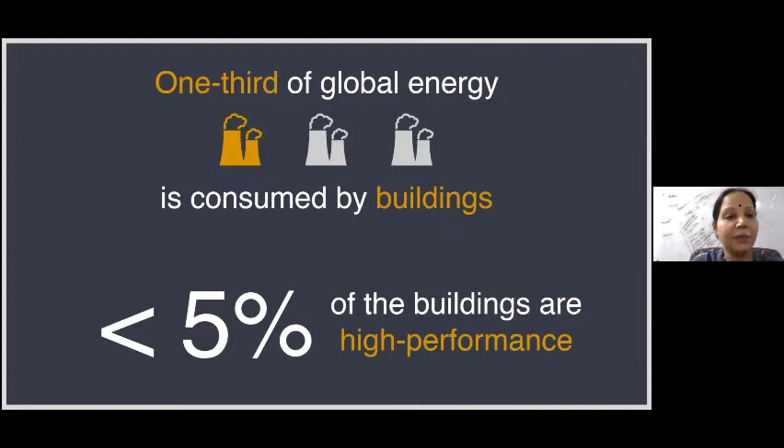There are two ways of looking at this. One is looking at existing buildings, and that is a different approach. Here the engineers can come in, see what we need to retrofit, and set up a monitoring and verification plan. There's a different process to it.

But what we can look at more intently, more keenly, is new buildings. In new buildings, how do we actually develop an approach? How do we have a framework? How do we go about creating the best possible spaces at the least possible cost, and at the same time, with the least possible resources, energy, and water consumption?

This approach itself is called the integrated design approach. There's no scientific terminology to it, it's just a collaborative approach where all of us sit together on the same platform, understand the design, and try to achieve the ideal or optimal approach to design.

So here we collaborate, we predict. When I say we predict building performance, we actually use scientific simulation tools, software tools. In fact, most of my interns who come in and intern with us, we teach them software tools, so they become productive from day one they join an organization. Today, architectural firms don't really use software tools, they're still using the time-tested way of trying to develop a design.

But how do we actually bring in science, and how do we prove our designs? We want to move from being a subjective field to making it an objective field. If I say I've put a window here, I need to tell them that it actually adds this much value in numbers. This is where we bring in the collaborative, predictive approach, and therefore bring in optimization. So new buildings is where we are trying to focus and create a better approach in design.

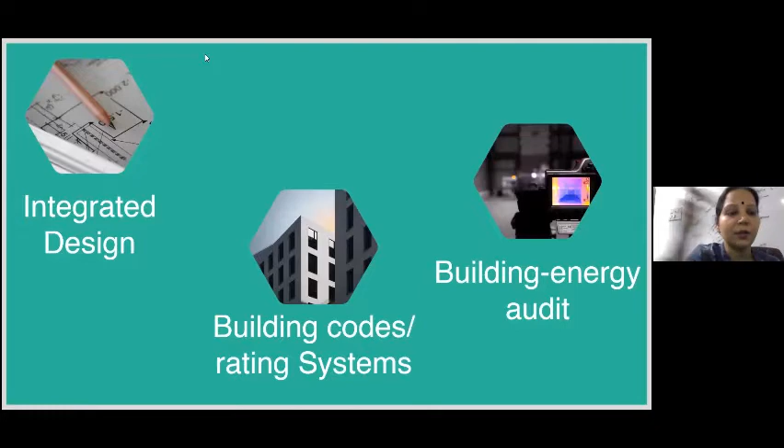So we look at codes and rating systems to guide us. People come and tell me it's just a rating. I say, yes, if you're looking at it as a documentation process, it's just a rating. But if you're looking at it as a tool to actually enhance your design process, that's where you can achieve the entire integrated design approach.

So I'll talk a little more on what the design approach itself is. We're looking at people who are using the building, and ultimately we're looking at the planet. We are using lesser resources, lesser water, lesser energy, and minimizing our waste. People think energy is the biggest crisis, and even government focuses on energy till now. But our biggest crisis is waste, how we manage our waste, and our biggest crisis is water. These are the two bigger crises in terms of climate change and sustainability that we are looking at. All this will contribute to the planet.

Most often people get confused when they say we are doing green or being sustainable, thinking we are spending more. If we have the time, I will talk about how we've actually minimized our first cost, not only operational cost, but also first cost. So we're looking at profits also, the 3 P's of any approach.

So what is the effect of the design we're looking at? We're first looking at reducing our carbon footprint, because any building is going to increase resource use and disturb the earth and its surroundings. So how do we actually minimize the impact? There is no way we can do without buildings, we are growing as a country, as an economy, and globally. Infrastructure becomes critical, but how do we also reduce the carbon footprint?

Today, net zero and carbon neutrality is a new field that's emerging. Earlier we never had the position of chief sustainability officer, today it's a designation in companies. Now the new designation emerging is chief carbon officer. When we are studying, we don't even know what jobs are there for us. So it's important to learn and be aware of what's happening around us, to prep ourselves for what is in the market, and adopt sustainable practices.

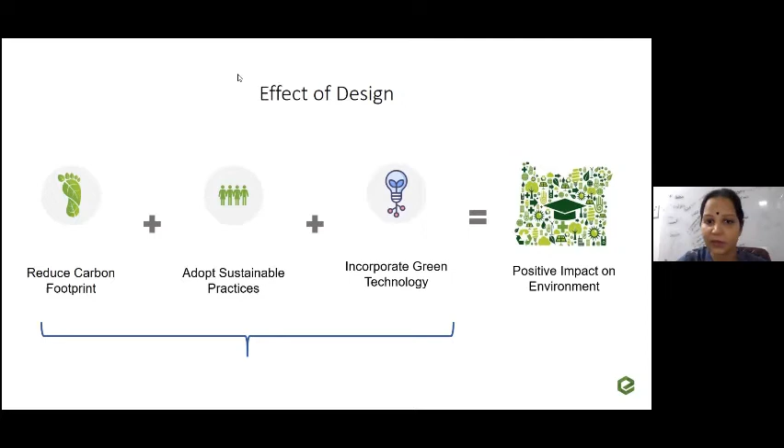I'll talk a little about building codes and ratings, because these are becoming policies in government today, relevant for architects who are graduating or as professionals. There are consultants separately who do just ECBC, the Energy Conservation Building Code. They're mostly architects, so they may not be designing buildings, but they need to know design of buildings to be able to consult on this. I'm going to talk a bit about this and what has happened as a result of regulations and policies.

Earlier, energy efficiency in building design was never spoken about prior to 2007. Only in the last 10-15 years have we been talking about codes. The government is saying we can't go on like this. Suppose there's a power cut, what will you do? First you will blame the government, saying the government is not giving us power supply. But what can the government do? Power supply is coming from coal, and we only have that much amount of coal. We can't increase our coal supply to match the growth that we are seeing. So unless you reduce on the demand side, we can't meet the demand-supply gap.

So only from 2007 onwards has the government itself been taking an impact and measures on the demand side. Therefore, policies are coming into place, and this is becoming a new field for us to look at, and how the market has transformed as a result.

So just to look at the existing policies and rating systems: there is the Energy Conservation Act of 2001 by the Government of India. Based on that act, the Bureau of Energy Efficiency was set up, and they launched the Energy Conservation Building Code. It is not yet mandated in Tamil Nadu, but it is mandatory in Telangana, Andhra Pradesh, Punjab, and Rajasthan. So slowly this will also become mandatory in Tamil Nadu.

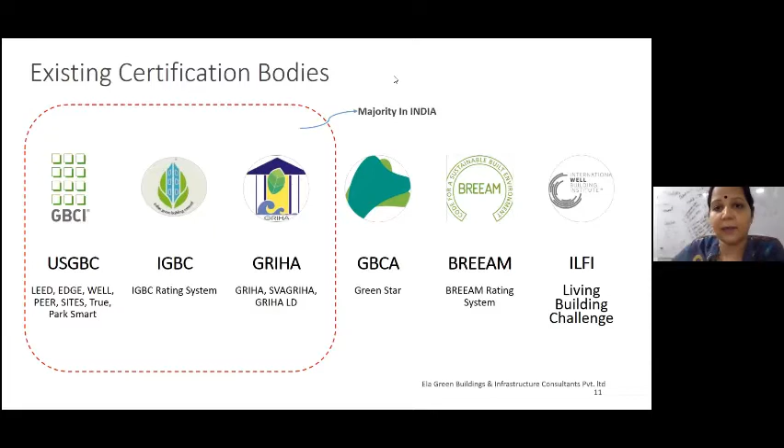I'm not going to dwell too much into this because today we have any number of ratings. We have the Green Building, the US Green Building Council LEED rating. There's EDGE, developed by the International Finance Corporation. There's IGBC. In India, we mostly have IGBC, USGBC, EDGE, and Griha rating happening. The rest are global, but it's only a matter of time because everybody sees India as a huge market. In fact, the biggest footprint of LEED, next to America, is India. India, China, and America are all the largest markets for various buildings.

So there are different types. If you're looking at just a park or sites, or if you're looking at multi-level parking buildings, different kinds of spaces have different kinds of rating systems that you can apply for.

Again, I would suggest you go into various websites. Follow the social media handles because that's how you understand what is happening, since all of us are on Instagram or Facebook. If you follow pages like IGBC, or the Bureau of Energy Efficiency, you'll know what exams are coming up. They're going to launch the Building Energy Auditor exam, so those who are interested in making it a profession can see how to qualify.

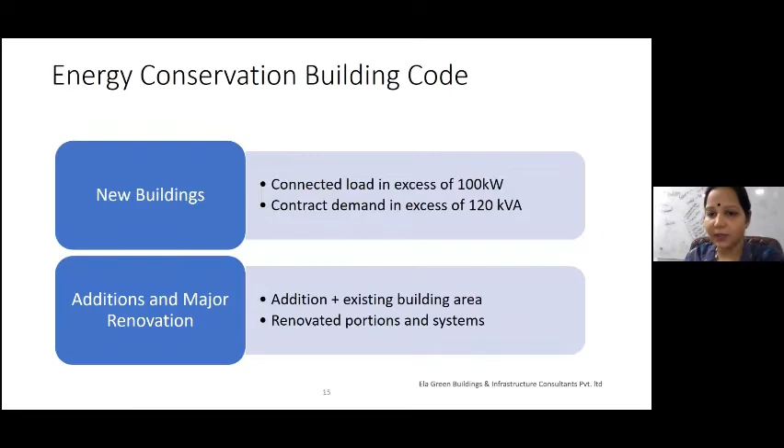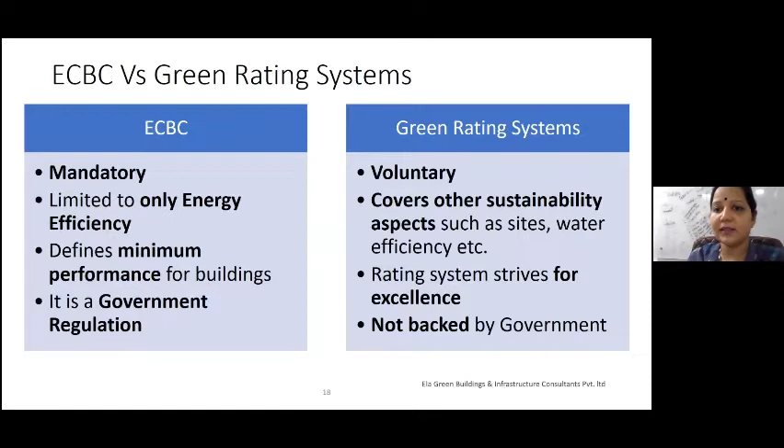Just a brief about the Energy Conservation Building Code - it is meant for commercial buildings, and only for new commercial buildings. There's a difference between ECBC or ENS, which is the codified series, and green rating systems. Majorly you have to understand ECBC is mandatory, green rating is voluntary. ECBC and ENS focus only on energy parameters, whereas green rating looks at site, water, materials, indoor environmental quality, and other things.

What is more important to understand is how these codes and policies have actually driven the integrated design approach, how they've brought about a market transformation. Earlier, when we started in the industry, we didn't know what volatile organic compounds were. They would just say low VOC paints.

Then today we have Shah Rukh Khan advertising, I think for Asian Paints, saying low VOC. So people may not know what VOC is, but they do know that when they buy paint, they should buy low VOC. Today you have air conditioners and refrigerators with star labeling - again, that's just to identify with the market. You don't need to know what star rating is or what the energy efficiency ratio is. All you need to know is 5-star means it's more efficient. That is the kind of market transformation happening in products.

In the job industry, I told you - if you're moving into a different job, we have simulation specialists, energy simulation specialists. Most of them are architects. We have BIM specialists. We have CFD analysis, computational fluid dynamics. These are all different softwares for understanding wind flow patterns, energy, and orientation. All these are various specialized courses.

Again, you don't really need to do a master's in any of this. While you're doing your B.Arch, if you start learning all these softwares - sometimes colleges offer these courses - you just become adept at understanding design better.

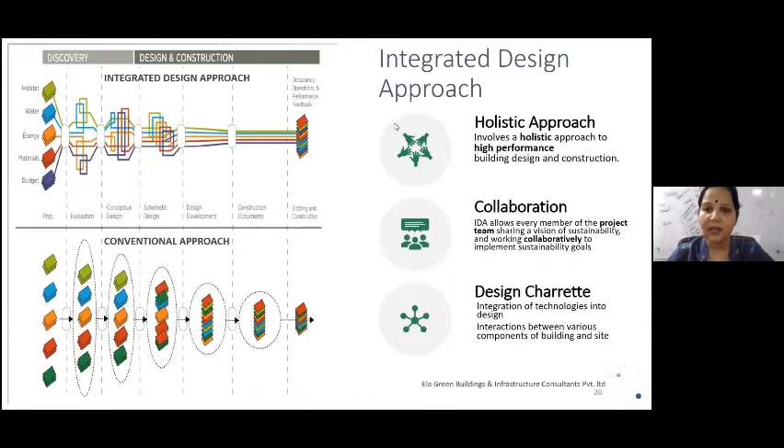So this is called design charrette, and this allows for collaboration. It's important that every green building we do, we drive the integrated design approach.

So when I say that is a specialized zone, now we as consultants, whether green consultant or energy consultant, drive this approach because most often the client is unaware, the architect wants to finish the job, and the MEP wants to do it at his own pace. So for us to put everybody at the table becomes easier when you have a green consultant or sustainability person on board. Now the market is shifting.

Earlier you just did materials, any building which cost less. You had single glass panels, buildings that became heat sinks, high-rise buildings coming up—that was substandard performance. Now we've moved slowly to typical building practices.

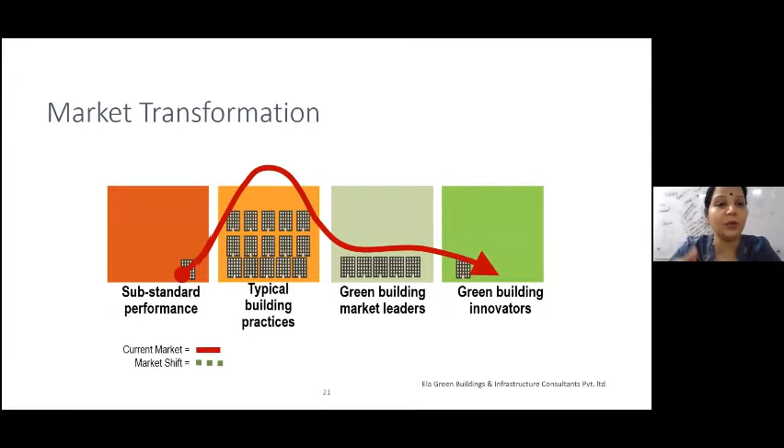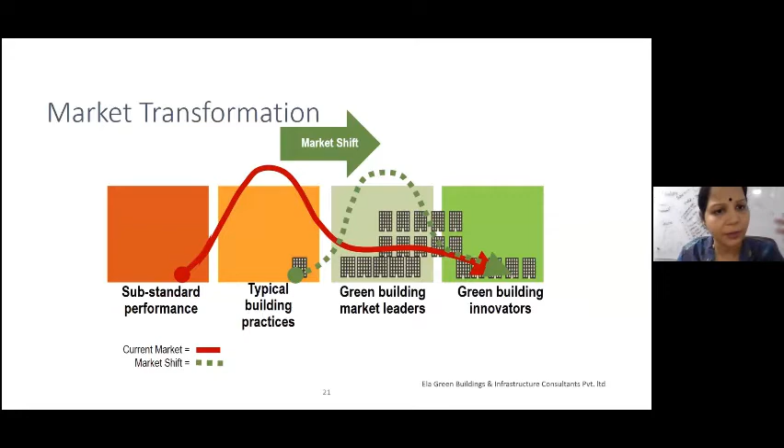And slowly, because of green building and all the codes, we are becoming green building leaders. But what we want to move to is green building innovators—we want to bring innovation into our buildings. This is the trend we'd like to see, and we're seeing it also slowly. We're still not at the innovation stage, but green buildings are now becoming the norm. All the big projects are going the green way.

Again, sometimes simple things don't make sense—like when Amaravati was announced, it was prime agricultural land, and they said they're converting 200 hectares of agricultural land into a city and making every building green. So how we approach it from the site level is important for us as architects.

Similarly, opportunities are there in terms of professions. From when we started in 2009 as an organization, we have grown—the projects have come, it's just growing. There are so many consultants in this profession now, it's become almost like architecture as a separate field, a subset of architecture.

But yes, there are third-party assessors today. For example, I'm a third-party assessor for various governments—government of Andhra Pradesh, government of Telangana—where I become a certifying authority to certify projects, because your CMDA does not have the expertise to look at a simulation software or report and say whether it's right or wrong. So what they do is hire someone, like chartered accountants. This is becoming a new profession in the building industry.

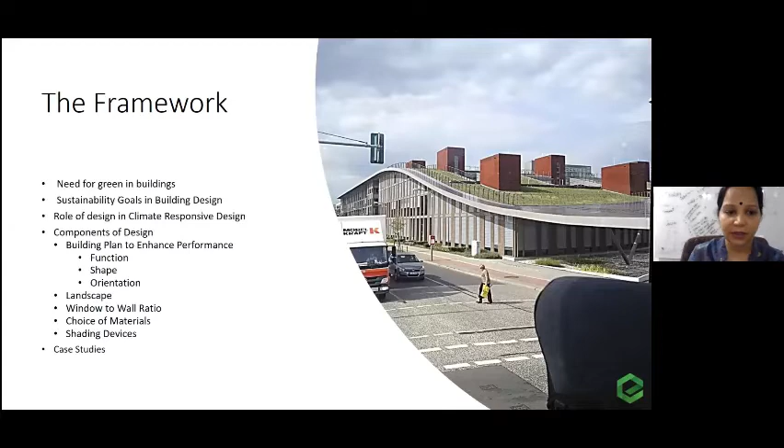Today, in technology, concrete becomes an easier, versatile material. But concrete also has poor thermal properties - it has a larger propensity for heat gain. So how do you insulate your concrete? Shading devices - there are various ways we can look at options.

Just to talk about integrated design approach - we have specialists working together. How many of us, when studying architecture, at least when I was studying, when HVAC was a design subject, I said 'when am I going to do HVAC? That's not my area of expertise.' No - you have to know a bit of air conditioning, a bit of electrical design, a bit of climatology. Unless you know a bit of everything, you cannot steer your design to the best possible outcome.

You have to look at the building and the site, how climate interacts with the building - without studying the climate you cannot start your design. How do various components of the building interact with each other? How does air conditioning interact with your glass? How does lighting interact with your interior materials? Every aspect has a relation with each other, so you as an architect have to drive the relationship. You cannot have the electrical consultant expect to know what interiors you've given unless you drive the approach.

Most importantly, only if everybody sits together can you achieve innovation. Otherwise you cannot look at any innovative approach. So that's the gist of it.

An ideal approach would be to start with the site - looking at climate, land use, landscape, air movement of wind, orientation, solar access, topography, and views, because most often people think views is only an aesthetic element. Only if you can connect to the outside through views can an occupant work effectively and productively inside a building. Most commercial buildings, any office space, the center will be open office.

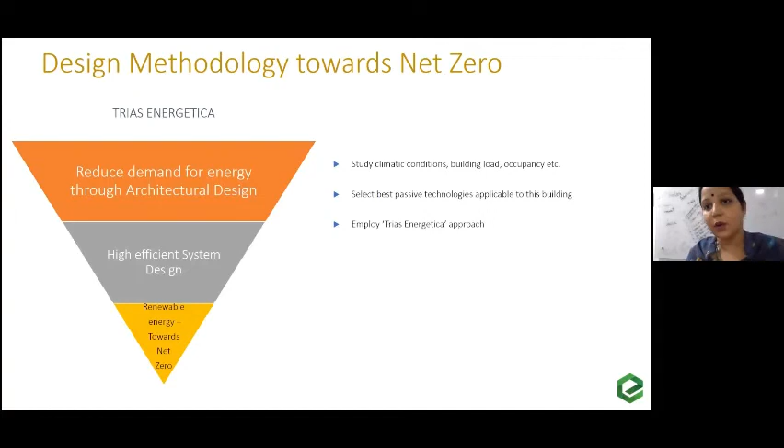Why I'm talking about this net zero approach is because today that is the buzzword. Everybody is talking about net zero, carbon neutrality. So it's important that you understand what net zero is. It doesn't just mean replacing energy with solar or grid. You have to follow this three-pronged approach to achieve your net zero, also called the trias energetica approach. And...

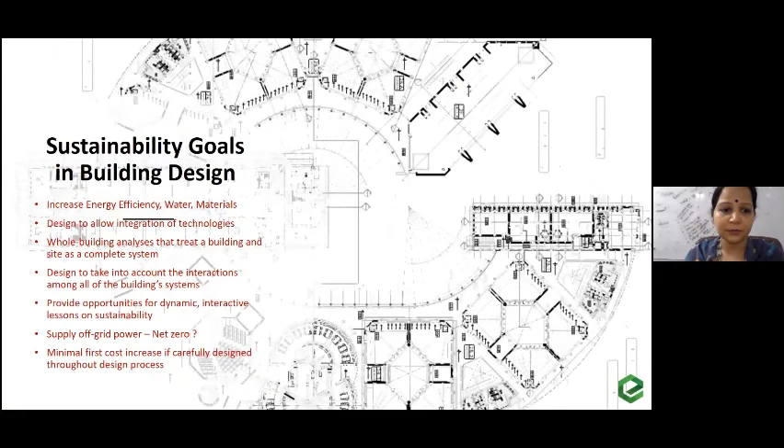Yes, all of us know climate dictates most of this. I'm going to just quickly run through, I think we are close to the end of the session. Am I right, ma'am? Yes, ma'am. Okay, so I'm just going to quickly run through how we apply all these parameters.

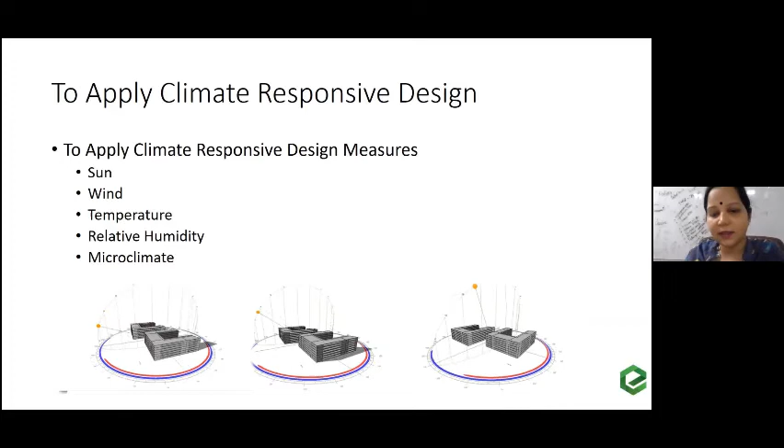Sun, wind, temperature, relative humidity, microclimate into our designs. These are some snapshots of the simulation software. Just like your 3D Studio Max, where you're creating an aesthetic model, here we are creating functional energy models to understand the impact of the sun path, the energy, all of those parameters.

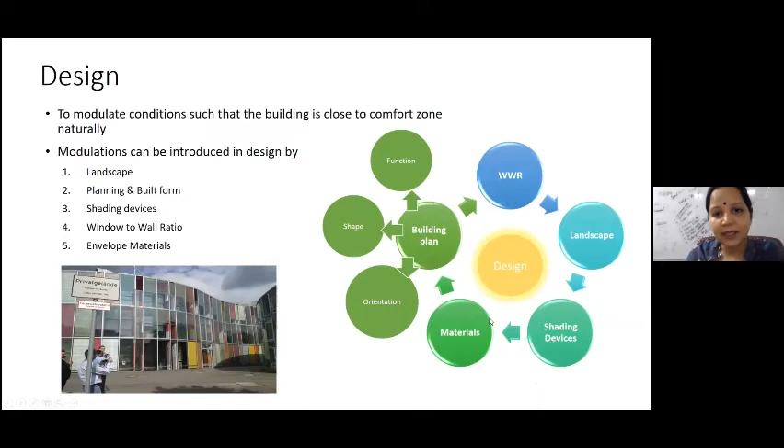So this again is just a diagrammatic representation of what I had spoken earlier. The design will have an impact on the plan, the window to wall ratio, landscape, shading devices, and the kind of materials we use on the facade of the building.

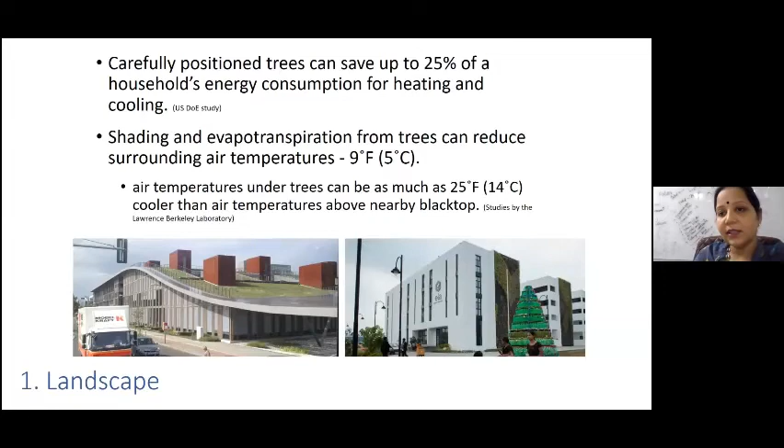Most importantly, even landscape can reduce the building's energy consumption by a large amount. In fact, there's a 9 degree differential. The US Lawrence Berkeley Laboratory has done a study where they measured temperatures in the same space under a tree versus over a blacktop road, and they found a 25-degree Fahrenheit differential between these two temperatures. So how important it is to have trees and landscape around.

Similarly, planning and built form. How do you place your functions in your building which require the least artificial lighting? So if it's a school building, you don't have to use artificial lighting at all. How do you plan that?

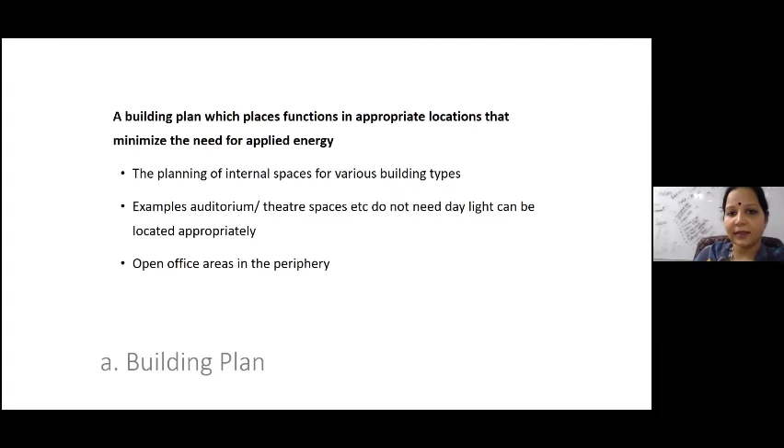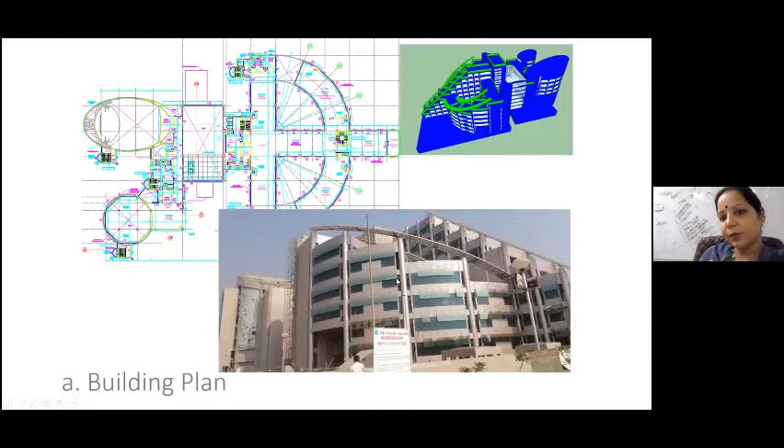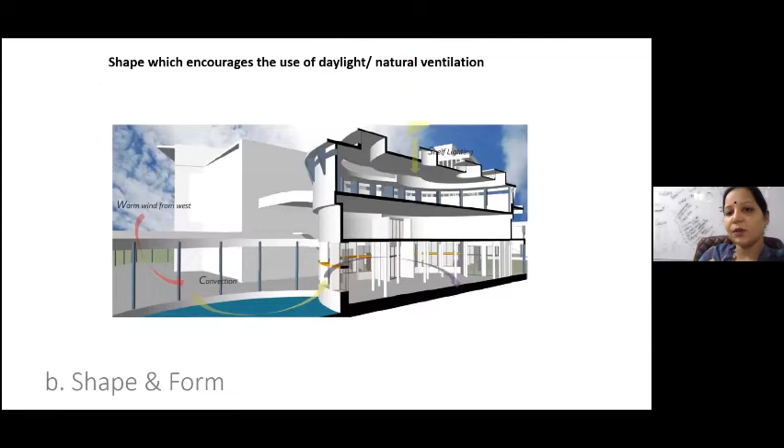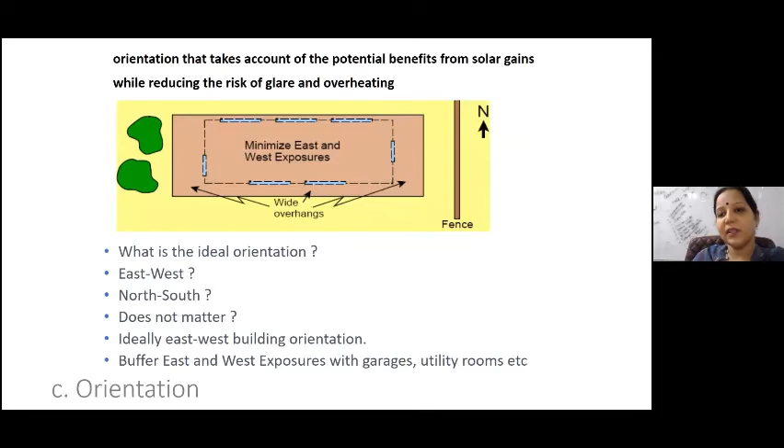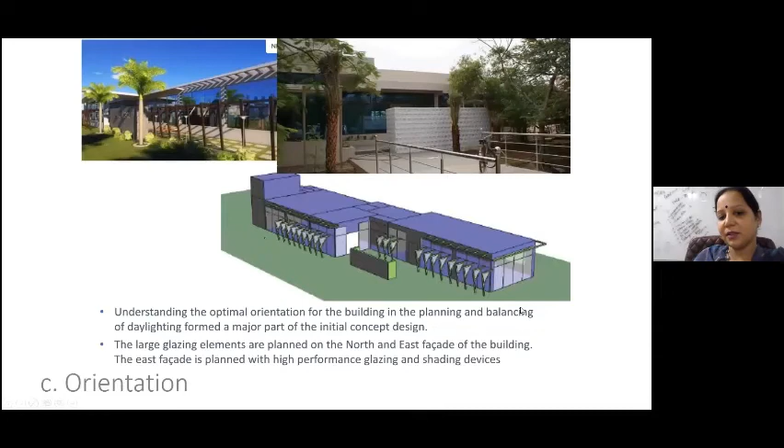Again, orientation - all of us know the basic is east and west get maximum harsh sunlight. So how do we buffer the east and west and have more glass, more daylight coming in from north and south? These are some principles that have gone into this, again the CPCL dining hall, where the entire glass elements are placed on the north facade with some kind of shading to make it aesthetically pleasing. At the same time, it impacts the glass.

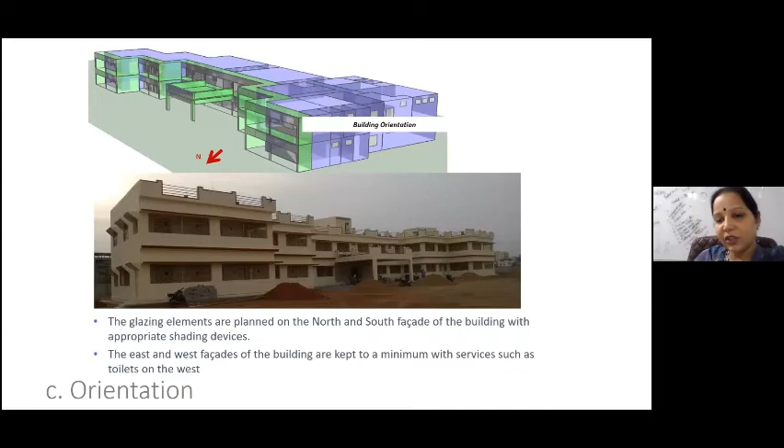This is an orphanage building again. The entire orientation is towards the north with shading elements to keep the children comfortable during peak summer.

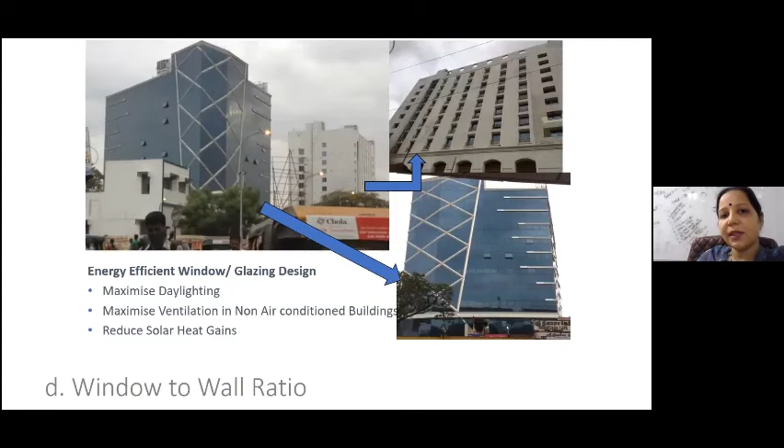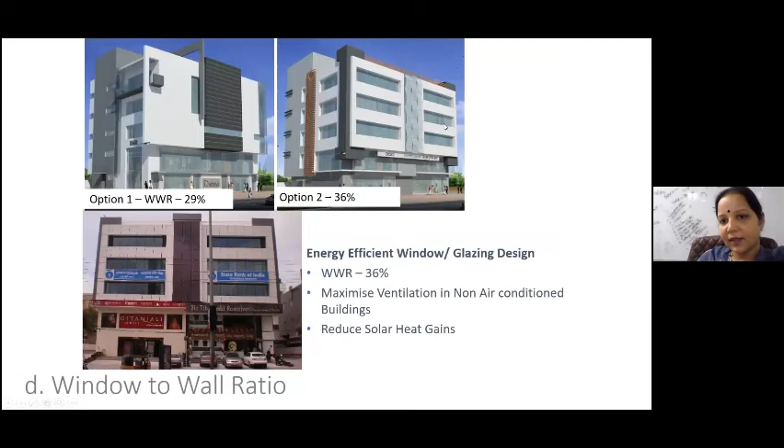I think all of us have seen this - just for students to understand, these are two buildings of similar sizes, but we don't want to create heat sinks, fully glass. We would like to bring in glass, but how functional glass is, is also important - and aesthetics we can always work around, right? These are some options. The first option gave us only 29% glass - there was not enough daylight. Then the architect worked back and gave the second option to achieve more daylight. So it can work vice versa also, based on daylight within the building.

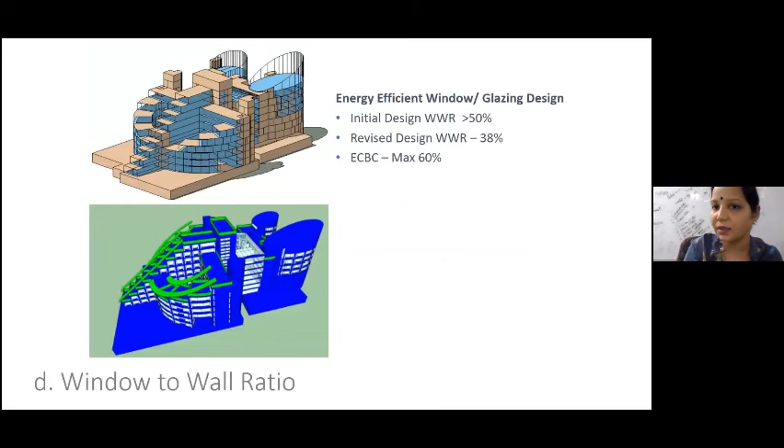Again, this is a simulation analysis of the Coal India corporate office building to understand its impact. So what I'm saying is, you can be very confident of your design only when you go with these numbers. Otherwise we are only talking subjectively, and it is being seen as an art subject. No, we have to look at architecture not as art-oriented, but as a blend of engineering and science also.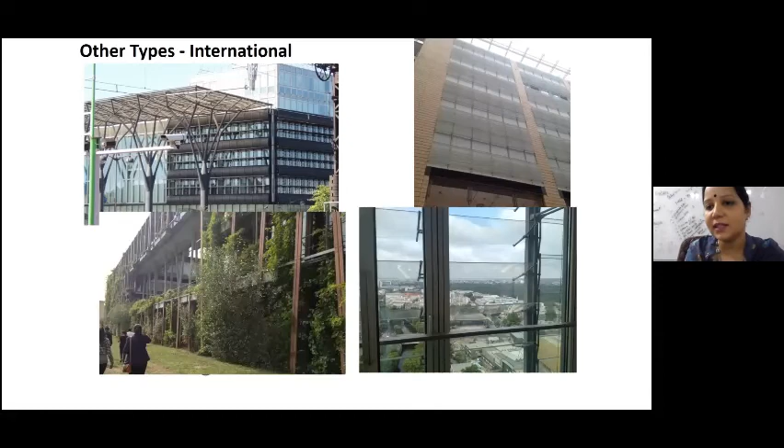So shading devices, you can have any number of ways how you can plan your shading devices. And the most important thing is, none of these ratings or policies actually restrict your design approach. They only enhance it and give you guidelines, but the design is completely within the scope of the architect.

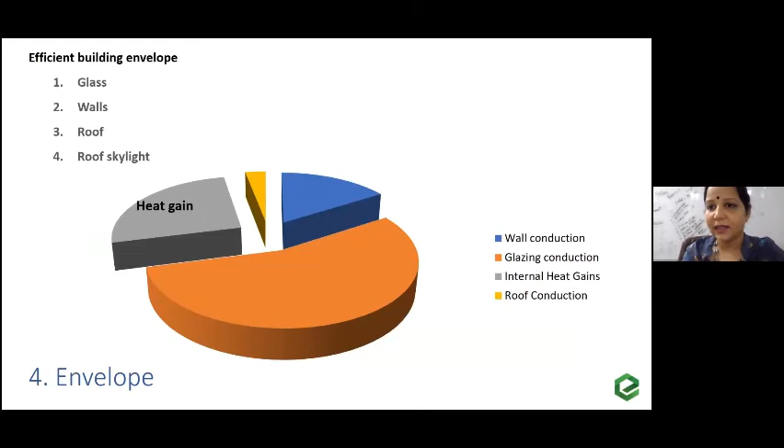Some of the projects where we've done various shading elements to understand this. Heat gain is maximum for glass, and that is important for us, so we look at materials and how we minimize the heat gain into the building.

These are some of the projects where we've used roof insulation with clay tiles. We've stuffed with coir for additional insulation, and we've done a rat trap bond. So there are various ways in which you can achieve this, given our constraints. Each project is different — some will be a large campus so you can play around with the area, some will be restricted in size, so it has to be a box building. Again, it's up to the architect to design.

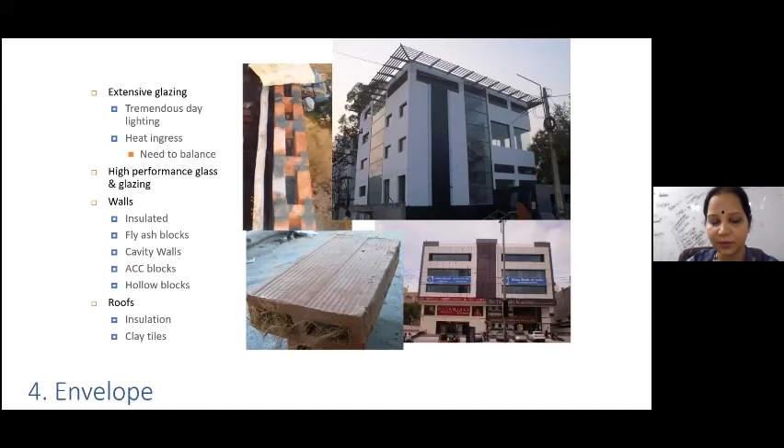So I think I will end the session here because I've passed my time. Maybe in some other session, I'll go into a detailed case study of how we can achieve all these concepts in real life — that's something we'll take up another day if the opportunity is given. Any doubts, you can let me know, I'll be happy to help.

Thank you, ma'am. Thank you for such an informative and intense session. I'm sure such an intense topic cannot be fitted in 20 or 30 minutes. We need more sessions like this to learn a lot from you, ma'am. As of now, we don't have questions in the chat box. I now request Dean ma'am to give the vote of thanks, a few words for the guest speaker today.

Thank you very much, Professor Kavita. Our sincere gratitude to Architect Samhita. It is an awesome set of information.

I'm sure the children have got it inside that now we have a source to whom we can refer. I'm sure many students going in for thesis would have found this an eye-opening session, and they would definitely want to experiment with the same thoughts and get back to you for a little more clarity. So it is the need of the hour. And as you said, it's going to get mandatory very soon in Tamil Nadu also, it's not too far away. And you will be in great demand for the children.